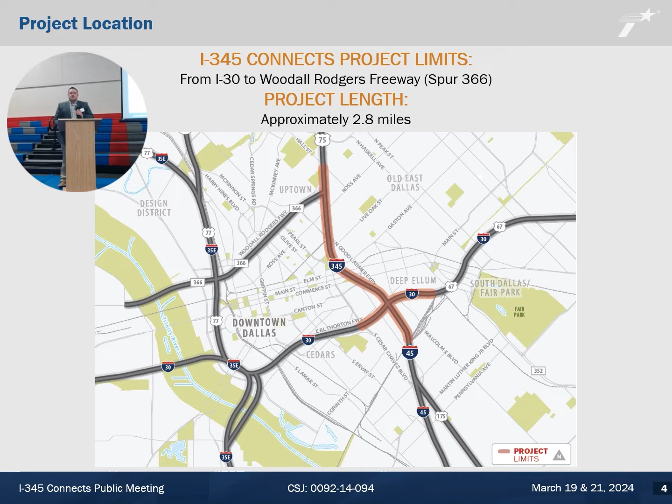The I-345 Connects project extends from I-30 to Woodall Rodgers Freeway, also known as Spur 366, and includes improvements to the interchange of I-30 and I-345. The total project length is approximately 2.8 miles. The proposed project is located just east of downtown Dallas in Dallas County. I-345 connects I-45 to US 75 through downtown Dallas and is currently a bridge structure.

The purpose of the proposed project is to improve multimodal mobility, meet current design standards, and reduce highway maintenance costs. The proposed project is needed because the existing I-345 from I-30 to Spur 366 provides limited direct pedestrian and bicycle amenities or accommodations to connect communities to achieve multimodal mobility, does not meet current design standards, and is reaching its useful design life, resulting in an increase in maintenance cost.

I-345 was originally constructed in 1973. In 2012, TxDOT conducted a feasibility study to evaluate 9 alternatives to improve the structural condition of the bridge, reduce maintenance costs, and reduce the frequency of maintenance and preservation activities.

In 2014, TxDOT began a study to review the major interstates surrounding and entering downtown Dallas. The Dallas City Center Master Assessment Process, or Dallas City Map, showed us the art of the possible. City Map developed 5 potential scenarios based on high-level planning that could be incorporated for the I-345 corridor. In 2018, TxDOT initiated the most recent I-345 feasibility study to further examine the 5 potential alternatives derived from the City Map study.

The goals established under the city map process included understanding how each alternative studied impacted mobility, connectivity, sustainability, and economic development. TxDOT carried forward those city map goals into the I-345 feasibility study goals.

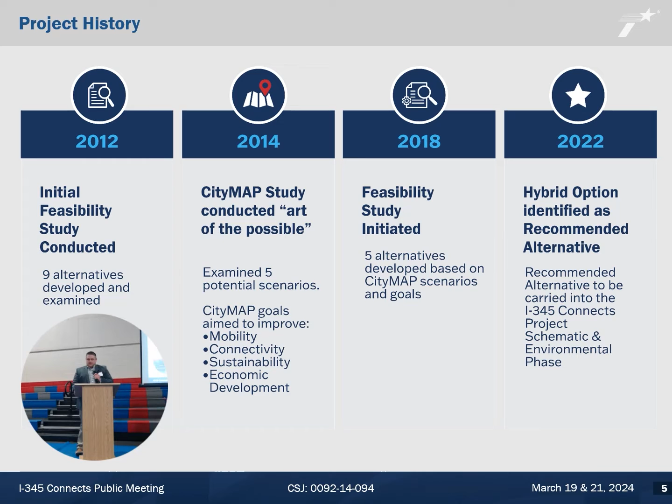After much coordination between TxDOT and the City of Dallas, the City Council voted on and passed a resolution on May 24, 2023 that conditionally supported the refined hybrid option.

The resolution called for the formation of subcommittees to address the various elements in the City Council resolution. The subcommittees include the Restoration of the Surface City Street Grid Subcommittee, which focuses on restoration of the surface street grid; the Surplus Right-of-Way Subcommittee, which prioritizes development of potential surplus right-of-way; and the Connect Dallas Subcommittee, which will ensure the project adheres to the Connect Dallas Strategic Mobility Plan.

The established subcommittees and their individual goals have helped the project team maintain a partnership with the City of Dallas throughout the development of the project by involving many city departments and establishing positive outcomes that support each subcommittee's purpose.

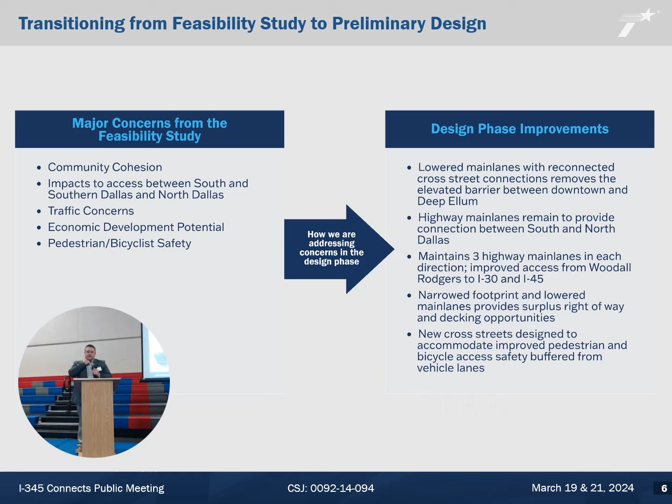The environmental review, consultation, and other actions required by applicable federal environmental laws for this project are being or have been carried out by TxDOT pursuant to 23 U.S.C. 327 and a Memorandum of Understanding dated December 9, 2019, and executed by FHWA and TxDOT.

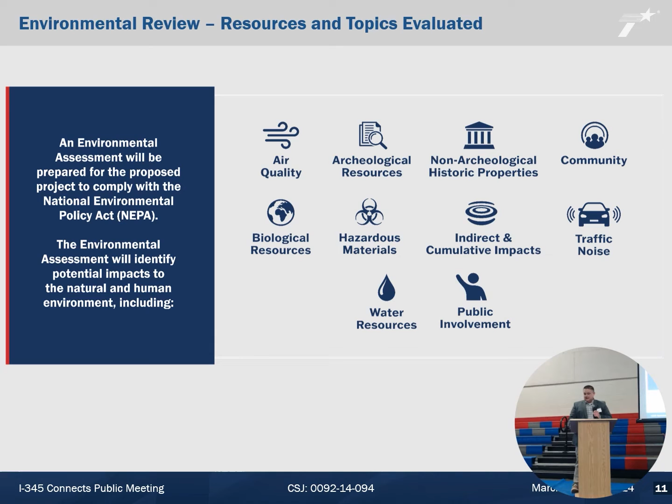An environmental assessment will be prepared for the proposed project to comply with the National Environmental Policy Act, also known as NEPA. The environmental assessment will identify and assess potential impacts to the natural and human environment, including air quality, archaeological resources, non-archaeological historic properties, community impact assessment, biological resources, hazardous materials, indirect and cumulative impacts, traffic noise, water resources, and public involvement.

Environmental studies for this project are ongoing. The draft environmental assessment will be available for review at the public hearing.

Currently, there is no additional right-of-way required for the project, and there are no anticipated displacements or relocations. The I-345 Connects project offers a surplus right-of-way totaling approximately 9.5 acres. There is a process in place that gives priority to the local government agencies who may be interested in acquiring such areas.

The process begins once construction is complete and is handled by TxDOT's right-of-way division. Surplus tracts would first be offered for purchase at the appraised value to the City of Dallas, Dallas County, and Dallas Independent School District for 30 days. If none of those entities is interested in a surplus right-of-way tract, TxDOT next offers it for purchase at its appraised value to abutting property owners for 30 days. If this does not result in sale of the tract, then TxDOT notifies the general public of the opportunity to submit a sealed bid offer to purchase, and the property would be sold to the highest bidder.

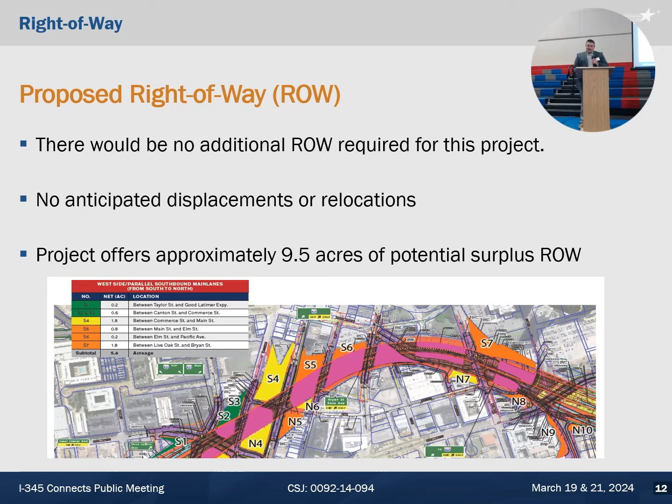The potential surplus right-of-way is preliminary and subject to change based on further developments from public input and technical review. The existing I-345 facility is an elevated urban highway that typically consists of 3 12-foot wide main lanes in each direction with 8 to 10-foot wide shoulders on each side.

The existing discontinuous frontage road lanes are 12-foot wide with 2 and 3 lanes in each direction. There are discontinuous sidewalks and limited bicycle accommodations located within the project limits. The existing right-of-way width varies between approximately 280 feet and 635 feet.

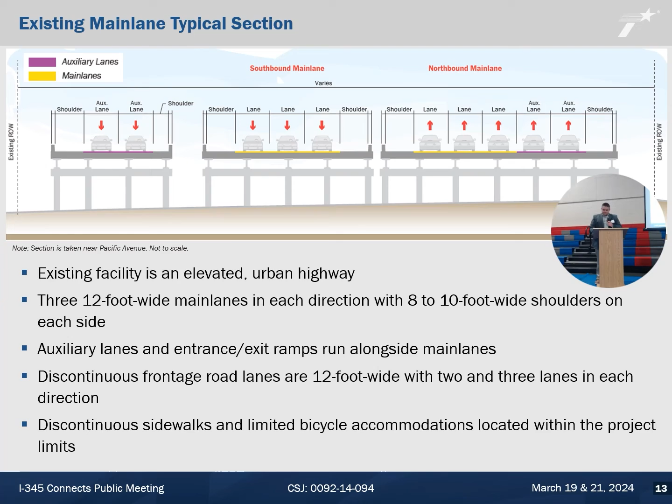The proposed project includes the reconstruction of I-345 to include 3 12-foot wide through main lanes in each direction that would be below ground, with city street connections over the main lanes. Various auxiliary lanes will be provided for access to interchanges as needed. Discontinuous frontage roads would be constructed between Good Latimer Expressway and Hall Street.

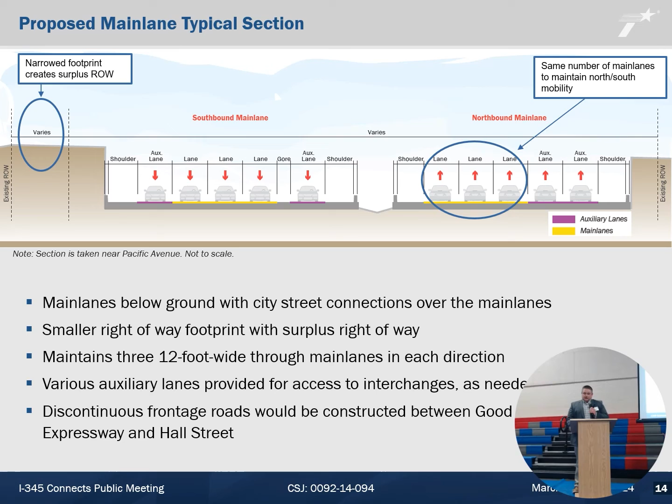Additional cross and side streets would be realigned and reconstructed at ground level to accommodate the reconstruction of I-345 and its interchanges with Spur 366 and I-30. The project would also include 10-foot wide sidewalks at cross streets on both sides, and 6-foot wide sidewalks along the frontage roads.

Crossings involved in the reconstruction include I-30, Canton Street, Commerce Street, Main Street, Elm Street, Pacific Avenue, Cesar Chavez Boulevard, Live Oak Street, Hawkins Street, North and South Good Latimer Expressway, Ross Avenue, Louise Avenue, Dawson Street, Hickory Street, and Spur 366.

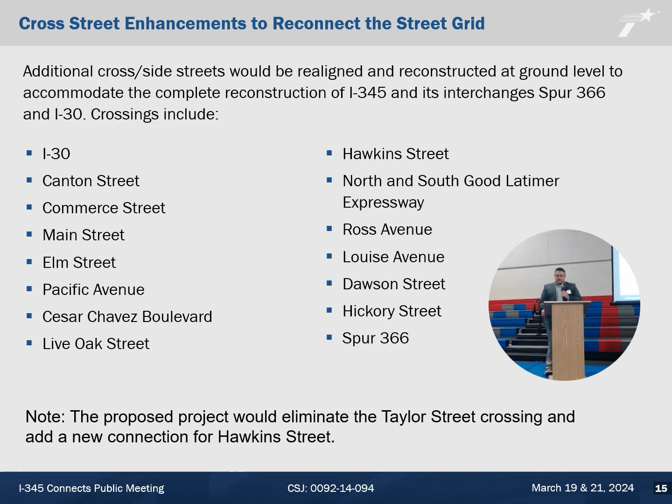The proposed project would eliminate the Taylor Street connection that currently crosses the highway and adds a new connection for Hawkins Street. Side or adjacent streets proposed for improvement include Eureka Street, Bryan Street, and Arts Plaza.

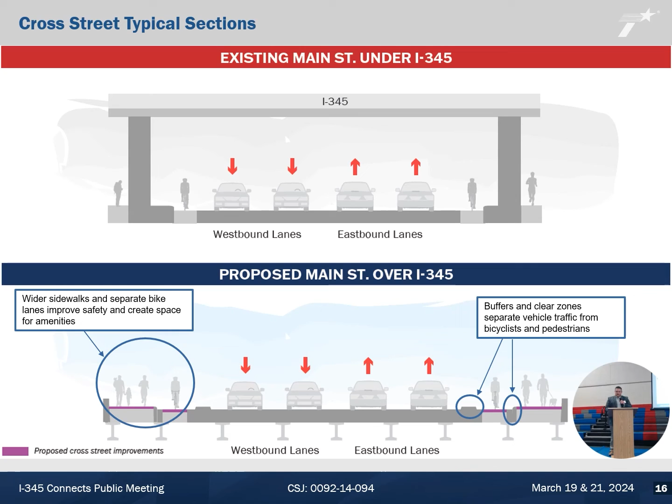The public comment period for this public meeting ends on Friday, April 5th, 2024. Following this public meeting, the project design will be refined per public input, environmental studies will be completed, and additional public involvement involving a public hearing will be held. The final environmental clearance is anticipated for the spring of 2025.

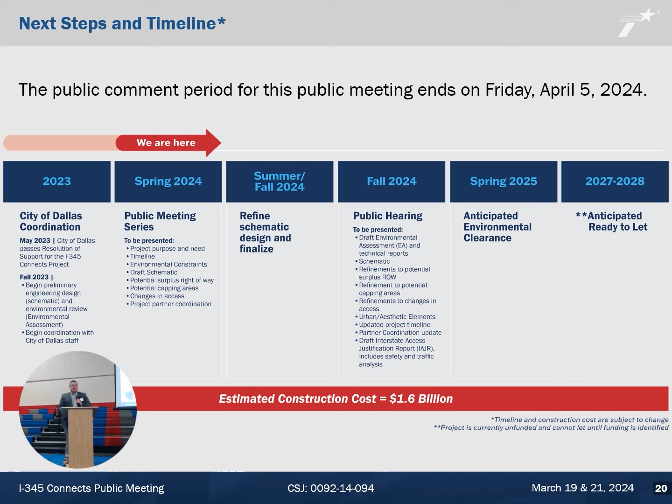At www.345connects.com, all statements, comments, and questions will be given careful consideration before final design features are determined. All comments must be received or postmarked by Friday, April 5th, 2024, to be included in the official public meeting summary.